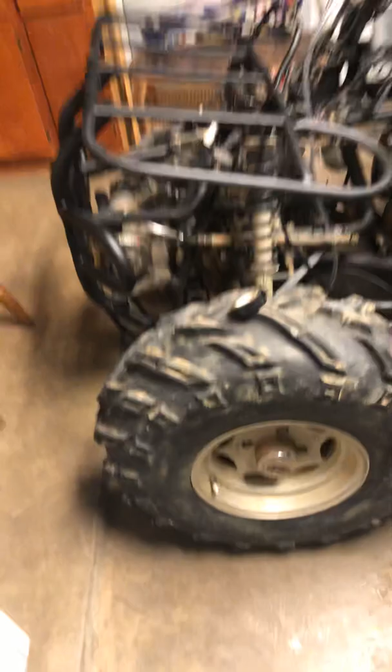As you can see, we got some tires on the old Big Bear. We got the winch set into place. We got the bumper on. We got to heat this up and bend it back so it's flat. The rack's got to go on. I fixed some of the electrical issues.

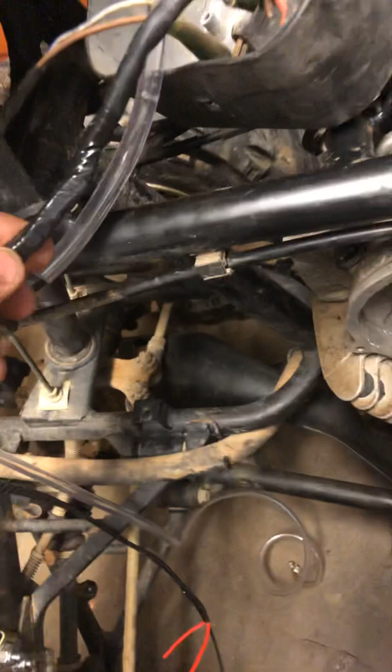Let's see, right here, I used a new product that I got in. Love it. That clip.

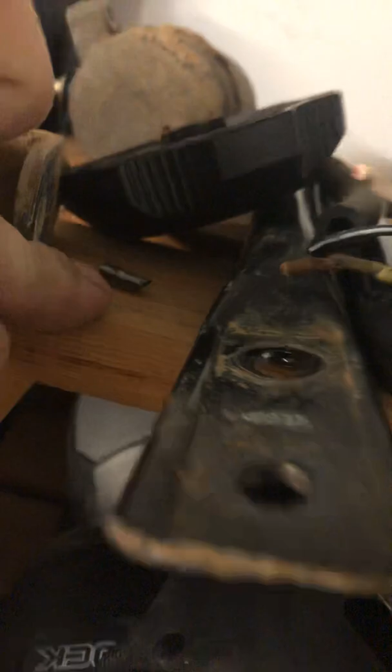If you can remember from my other videos, this is all my destruction: my rear shock, most of his parts, my dad's fuel, his starter, a bolt we had to cut off for his four-wheeler, pieces of a check ball, this flywheel key right there, my bars, but here's that piece that I fixed.

He was having a short, and it was shorting out right there. Come on, adjust.

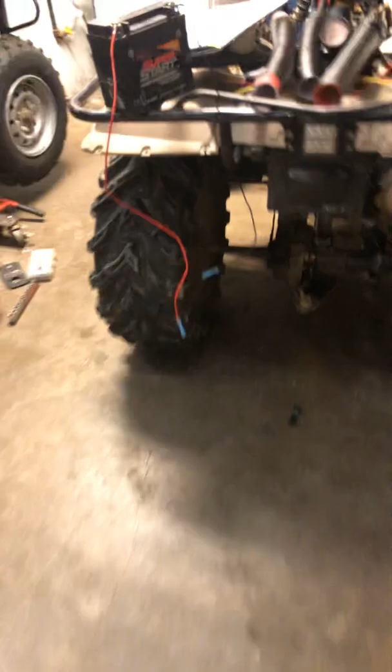Right there, so I cut that harness off. This fuel hose that came off my pop's four-wheeler, that fuel hose, so I cut it off. I connected it. His rear brake light wasn't working, so it was shorting out.

So I used some heat shrink and made a loom. We're going to roll that up and put it in here, on his rear bar back here.

Now, I've never seen one of these before, but I'll show you real quick with my little battery here. You go power to the yellow wire, ground to ground, and it turns yellow. You go ground to power on the red wire, and it's a regular spotlight. It's just a flush mount.

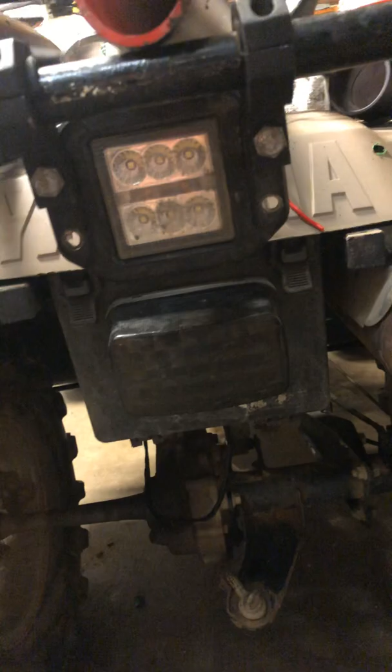Everyone does those flush-mounted dualies on their Honda 300s. It's just a flush mount for a backup light. It's got his tail light.

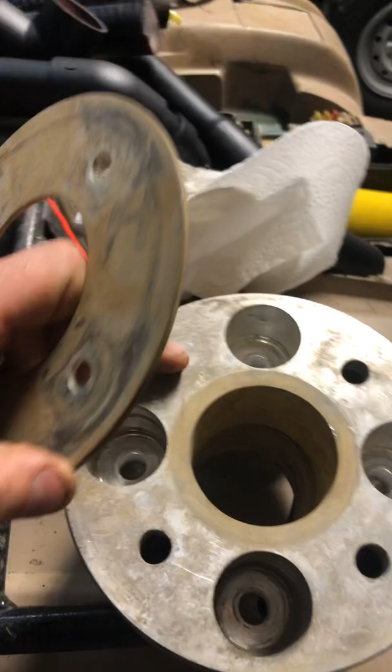We put the tires on. We were going to run these, but they don't have any studs, and the bolts that came with it are kind of dumb, and I didn't feel safe doing that.

We got the top end put back on. We got the chain on. We couldn't get the chain because it came off down here, so we pulled this off, and lo and behold, the flywheel key was sheared off.

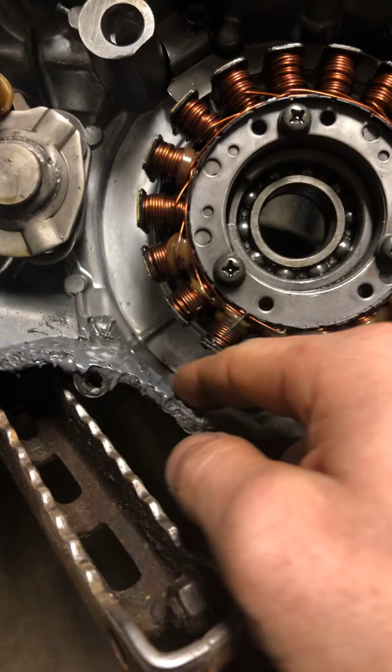Somebody's already actually been in this motor, because they brazed right there and right there for an oil galley that goes into the motor for the transmission. They didn't have money to buy the $400 case, so we JB welded this piece that was cracked, that piece right there.

It was a rollover bike, but as you can see, this has got a washer here and the cam gear right there off the crank. He thought we were going to have to take these out because it was too tight, and I said no, all you got to do is just lift up on that. Got that done.

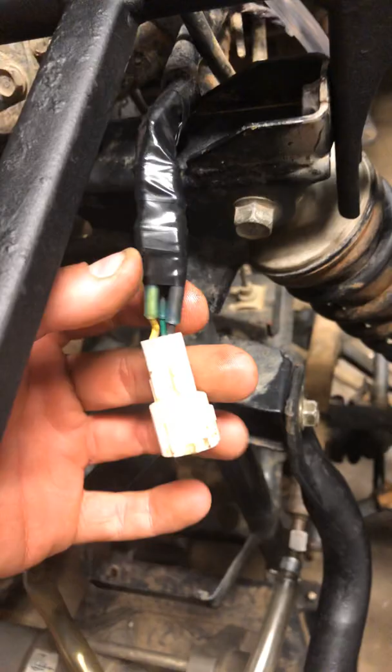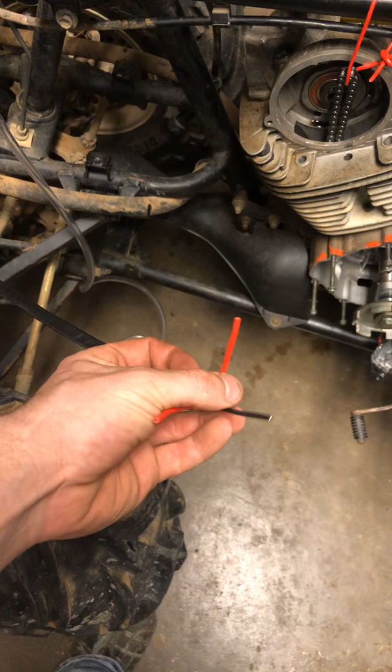Made him a harness for his lights, tapped into the high and low beam here. You can see where it's heat shrink there, male and female. Made him a wiring harness there, loomed it. Whenever we get ready, we'll turn the lights on and figure out which wire is high, which is ground, and which is low.

We're working on getting a couple things done, but we can't really do much because he's got to get that 50-cent flywheel key first.

We got a snorkel done over here. This was just wiring up some stuff. I got the garage kind of cleaned up. I got my four-wheeler in the garage now.

I'm going to do another video on it here pretty soon. And I got my dad's running. I'm waiting on my carb adjusting tool to come in right now.

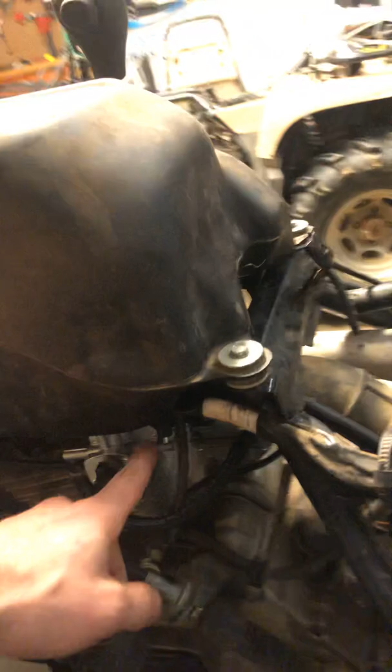But I got the carburetor put back on like everyone said. I got the vacuum line there, the vacuum line there. I got this right here, the gas line run to there. Got this back on.

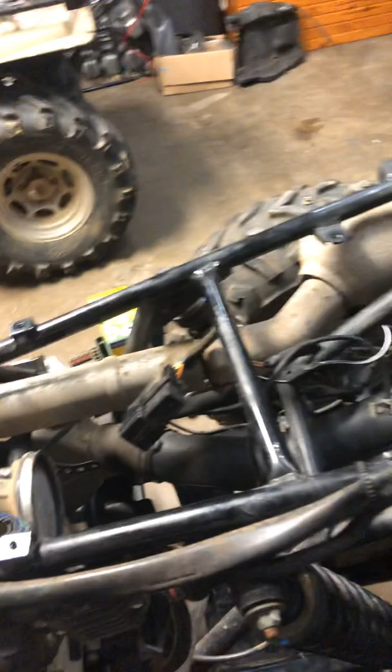I'm waiting. I'm going to try to do this by myself, but I'm going to try to put the back plastics back on so I can set the battery back in, because I just had it sitting up here with the lines connected and everything, and I cranked it and it popped off, ran back, fired, and I was like, I don't want to break anything.

So got that done. I'm going to put this section back on over here, get the seat on that side put back on, get everything all nice and tidied up over here, but that's about all the work I've done.

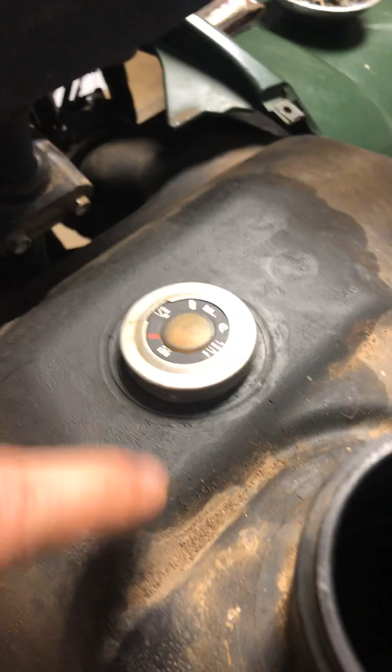I did free the gas gauge up. The gas gauge was all messed up, you can see there. I freed that gas gauge up.

Got the book out over here trying to figure out the vacuum line. You can see this part right here shows it is number 6, which goes to that, which is an air vent hose. Number 29 is the vacuum hose.

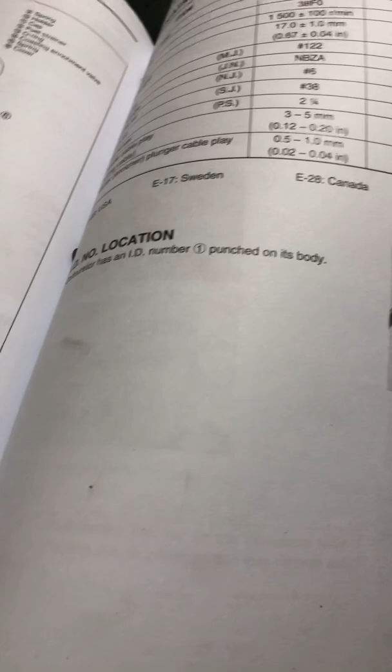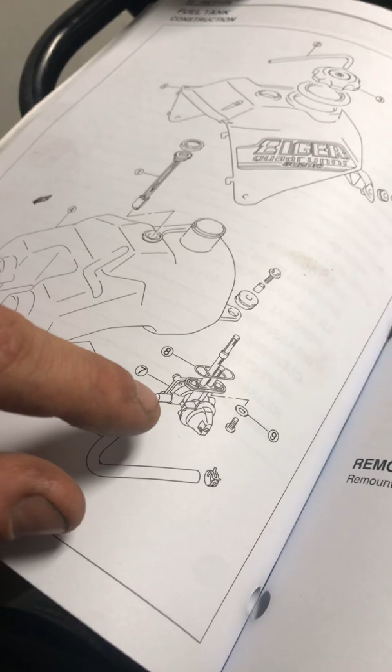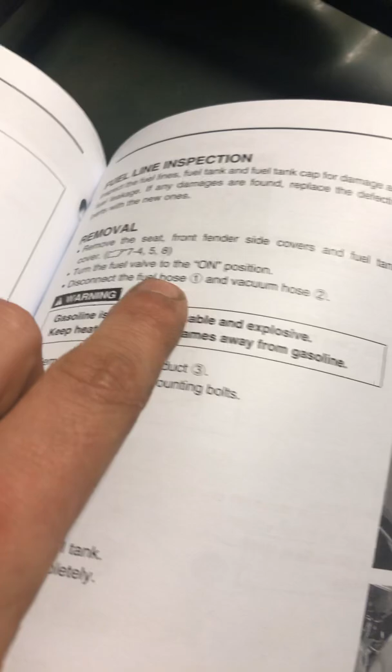This is a newer style apparently, because on here it shows number 1 being the fuel hose, number 2 being the vacuum hose.

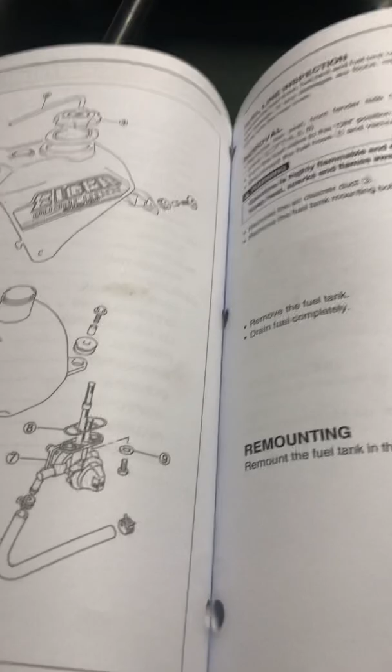So I got that fuel hose right there going to the carb. Got that all done. I got to put all this stuff back together. I did put a new valve on there, as you can see.

This has all the pilot and everything. That's how I rebuilt the carb. See on this, it's got remove the fuel hose, air vent hose, and vacuum hose off the front. The vent hose, see, that went to the carb. That went to just a drain, that there.

I got a gust of wind coming in here.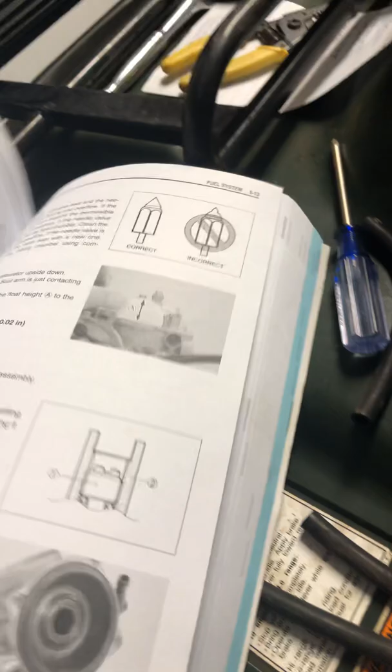Yeah, this is the manual on how everything runs and works, and you can see the inner workings of it here. And then that goes up, the vent hose goes up and into the tank. Then you got the top of the carb right there, goes to that. Got it done and buttoned up good, so all that will be good.

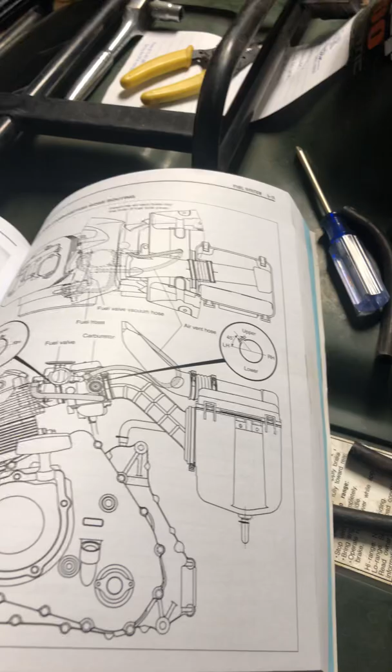I'm just waiting on everything. I'm going to try to tackle that.

And I got my trailer tires. I bought my trailer tires this weekend for my trailer. I'll tell you all about that. And I got my tires here. I got rid of all those tires that were over there, those BKT type tires that I had.

A little update on my four-wheeler. As you can tell, I've done some trimming. I did a video about it. I did some trimming. This thing doesn't look like it's ever hit mud, and I'll show you why.

Mud Slinger. So it's like SC1, but...

I got the rear shock put on. I have not adjusted it yet because I don't want to break it like I did the other one. I just have it on factory setting, which is on the second pin. I'll jack it up all the way to the end, which will give me about 1.5 inch more lift in the rear.

So far, I love these tires. Love it. My gear reduction, I've got to do a 15% rear reduction on my four-wheeler. Just getting into the thick mud, it bogs down. These tires bite really hard.

So I am running 70 pounds each side, wheel and tire combined. So that's 140 back here and 140 back there. Trying to spin 280 pounds of wheel and tire for this thing. It's a little 420 cubic centimeter.

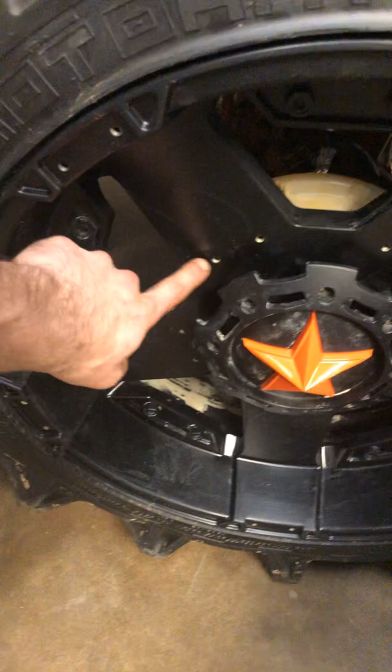CC's, so it's pretty heavy on them. I did take, if you can see the screw holes, I did take the screw holes out. Just like them that way. I threw the fins away and everything.

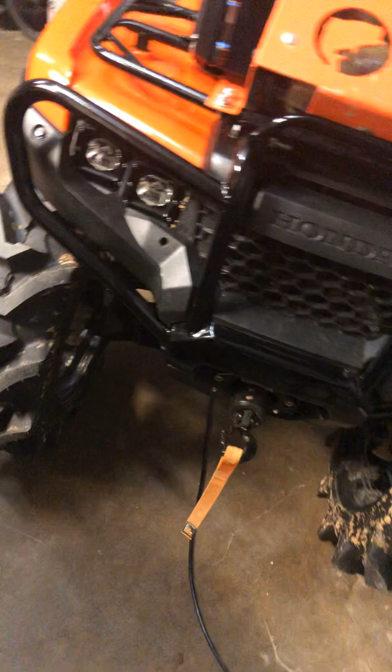I have put a Foreman front bumper on it since last time. I've had it in the garage. It's been at the ranch for almost 5 months. But put the Foreman front bumper on.

It was easy, unbolt, bolt back in, swap that over. I did put my radiator bottle on. My radiator bottle was cracked, the one that I had at the ranch. So I bought this one off the line. I think it was like 20 bucks.

Put the line there, the vent line, for the suction line there. The vent line is actually right there. Run underneath, vented. Shows you your little deal.

The only thing I'm worried about is snapping these two off. I don't know how sturdy those are.

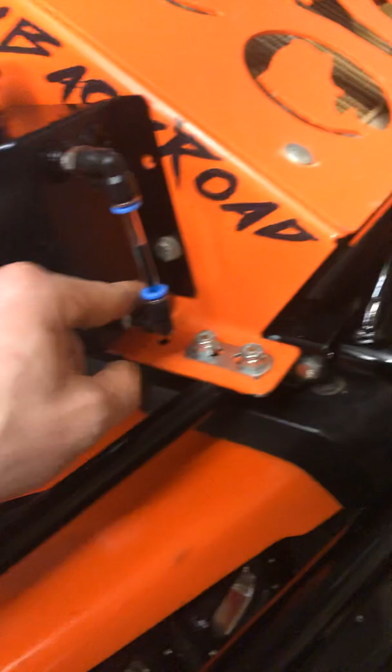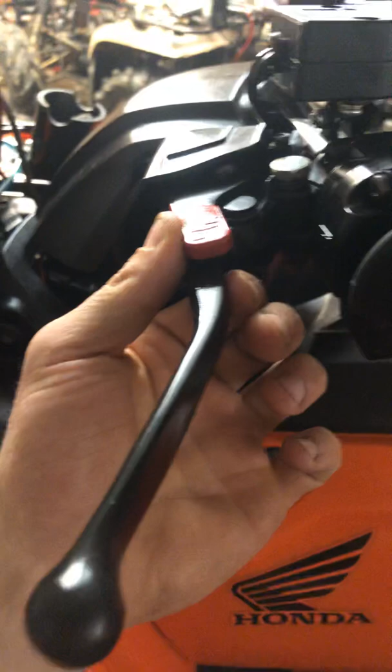I'm about to get a fire extinguisher bolted here. When I do ride, I do lock this in and I zip tie it. That way I never have to worry about downshifting to go over in the reverse.

I am at chest level right now. Just to show you how tall this four-wheeler is, I'm at chest level, and this thing is hitting me right in the chest. I'm 5'9", so here is how I have to do my knee to get up on it.

Got the rear light bar. Somebody hits this, breaks this, it was $5 off Amazon. I can go buy another one.

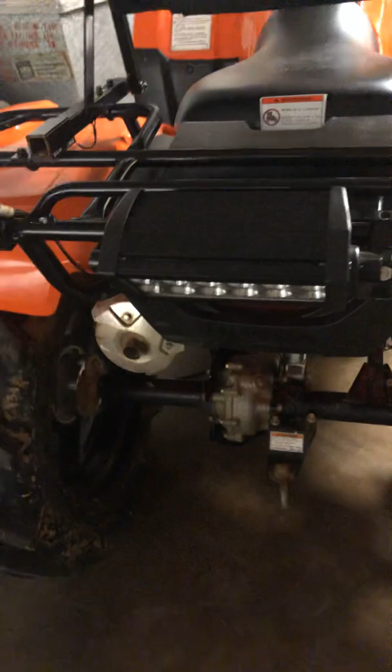It is actually a floodlight, not a spotlight. The spotlight is the one that's up front. That one is a floodlight. This night light is there. That's the spotlight. My Kolpin gun boot mount only comes on for hunting season.

And then I got my back with my cooler. Drilled holes, custom holes here and custom hole there to get it right at the angle, because before it was either straight the hell up right there, or yeah.